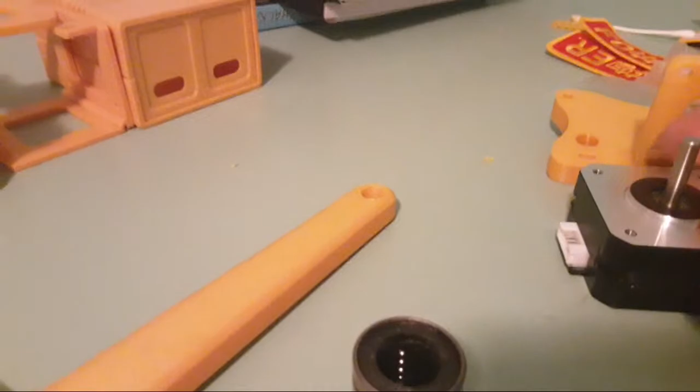Little bit of progress on this plotter. Got some steppers and bearings. Some more bearings, I think. I think this trip I've got some electronics. I went to get electronics and screws the night before, and yesterday, and ended up with the wrong size screws and the wrong electronics. So hopefully tonight I've hit a jackpot. Otherwise, I'll just keep going. They're in the storage unit somewhere.

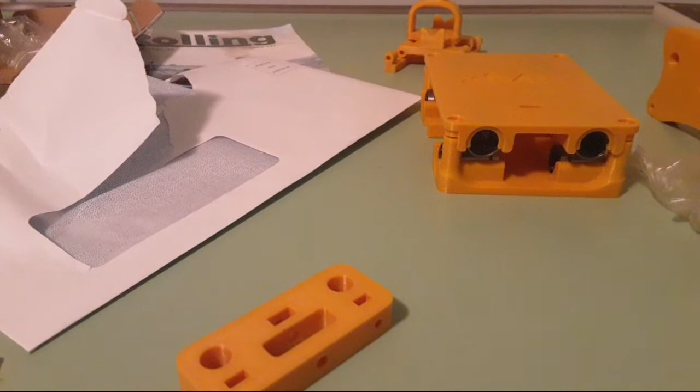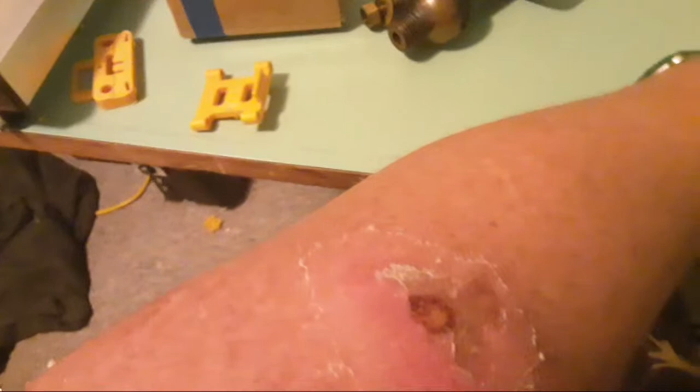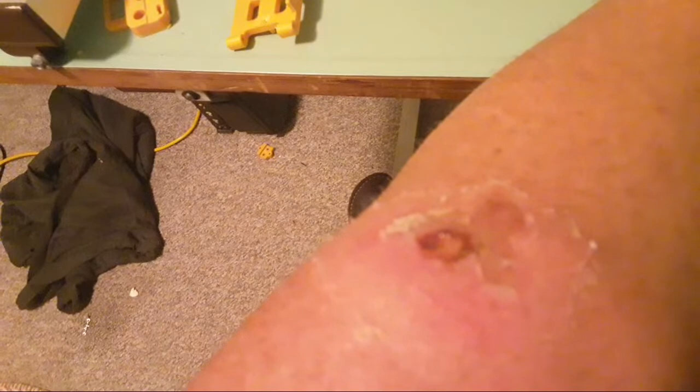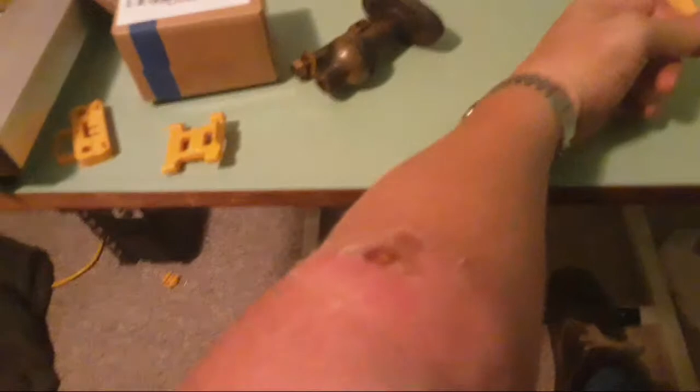What's happening? Look, I wasn't feeling real good last week at all. Bit ordinary actually. So, upshot and outcome of that is that I got bitten by a spider, which isn't fun. And that's probably where the issue was anyway. It's gone down a bit. It's not as crazy. Let's have a look here. But it's not as crazy as it was. The skin's all peeling. Try and get some focus happening here. Sorry. I'm not doing real well with that. Really?

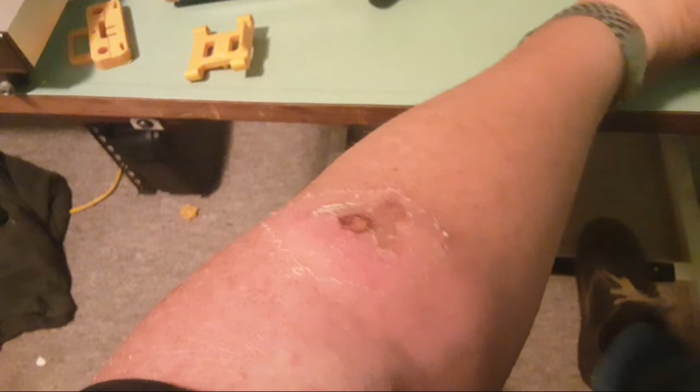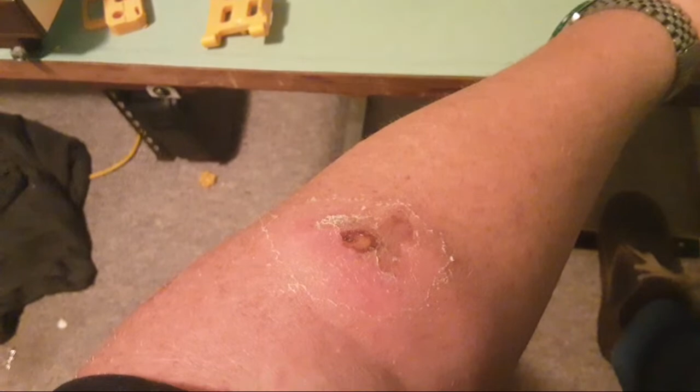Anyway, had a big hole in it on Sunday night. Saturday, I really had a temperature and I really wasn't feeling particularly good. Sunday, I probably felt a little bit better. Monday wasn't terrible, I guess, at work. Tuesday, I got up and did stuff. Today, I went to work and by about 4 o'clock, I had a temperature, but that's fairly normal with this. Anyway, I think it's coming right.

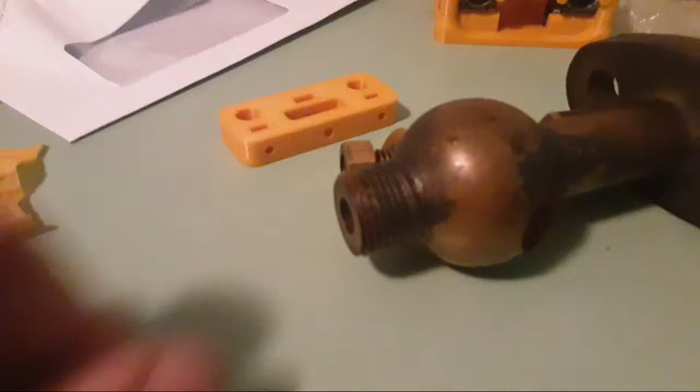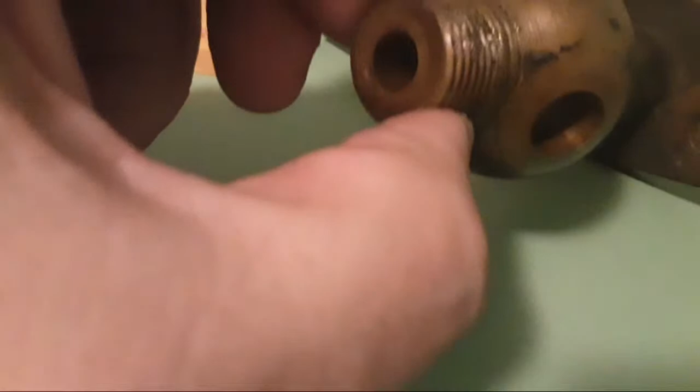We've got this. I guess you all know what this is. Our experts would know exactly what this is. Besides being covered in 600 weight steam oil, this is a drain cock off a Fowler traction engine or a Fowler roller. Cylinder drain cock. Or, well, such as it is. That's sort of the theory behind it, but it's pretty rugged.

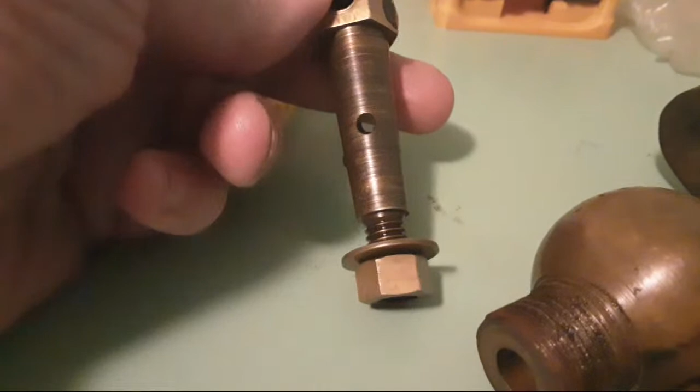This is the plug out of it, which sort of works. It closes one way, which is all it has to do, because the hole's not straight through the plug, because it's just been put in here and drilled. I think we could do better than that. And it's got a hexagon on it, which it shouldn't have. The hexagon's a bit crap. So, handrail knob.

So, going to make 4 of these. There's 4 of these, all up. And these are all sitting in different depths. Some of them are touching right up here. Some of them have got 1/4 inch gap. Some of them have got enough thread to get a nut on, and some of them almost do. Some of them don't do up tight. They're a bit ugly, and they're hexagon. So they need to be square on the end, and they need to be a little bit oversized, just a fraction, like 30 thou oversized, 25 thou oversized, something like that, at the same taper, pretty well.

Gonna make 4 of these, say 25 thou over, with thread on the end, find some washers and nuts, and a square on this end. And then I'm going to make an extra one on the same setting out of silver steel. And we'll cut that in half, that'll split it, and sharpen up the flat side, and we'll have a reamer then to clean these out.

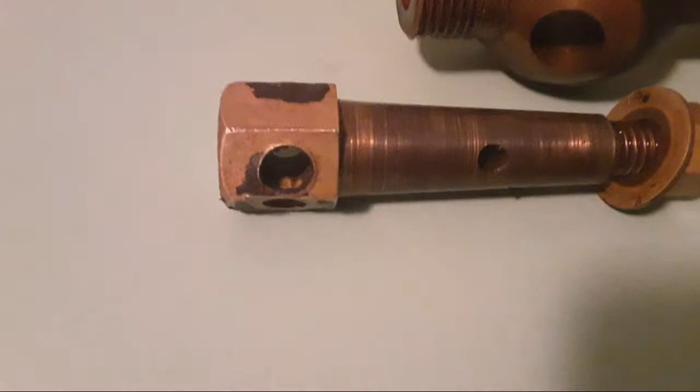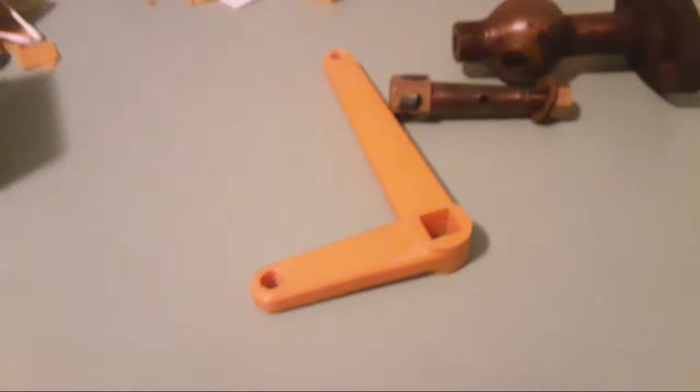That's the theory. We run a reamer through them until they all fit in the same depth and everything else, and the nuts all do up nice. And probably we'll have a nice slotted hole in here all the way through to get plenty of steam through, which will help. So that's the theory with them. They should have, right, this crazy system. This is a little bit better than the crazy system that's got, but it's still not ideal.

Right. What is the angle and is it a standard? Really good question, Stuart. I'm just going to set it up between centres and get the cross slide right and read it off, and I'd say that'll do. That's where we're going to go with that. And while the machine's set up, I'm going to do all 4, and I'm going to do the spare for the reamer.

This lever needs to be steel or brass or something. I think they'll be cast iron, to be honest, but probably going to be cast brass or just out of steel or something. Joe's offered to CNC mill them, whether that's going to happen or whether I actually just go and get 4 of them cast. File them out to match, but they go on there. Like, they're supposed to go on the square that's actually a hexagon with 4 holes in it, because this had bits of flat screwed through here.

Look at this. Had a piece of flat screwed out here, another piece of flat screwed out this way like this, and that's what was used, was the lever. I think we're going to improve that, Dan. Sorry about your automatic shut off, but I think we're going to fix this properly. There's no point doing it half-assed if we're going to do it.

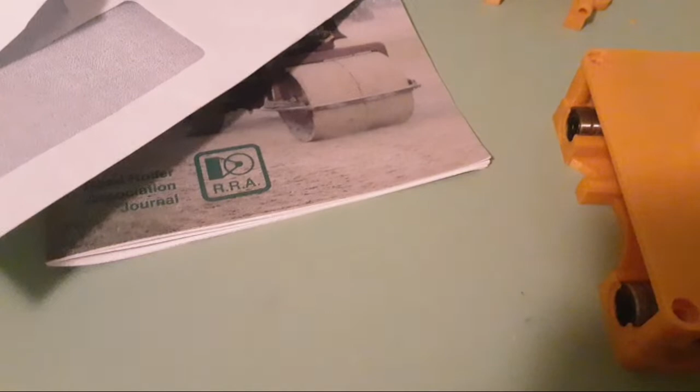In and out of consciousness was probably not my doing, or something. That was probably something that Dan had control over. So that's kind of where we're at. Excuse me.

So the sooner I can get the lathe back here to do some of these little jobs, the better. Nigel's just bought a laser engraver cutter. That's awesome. It's probably much nicer than mine.

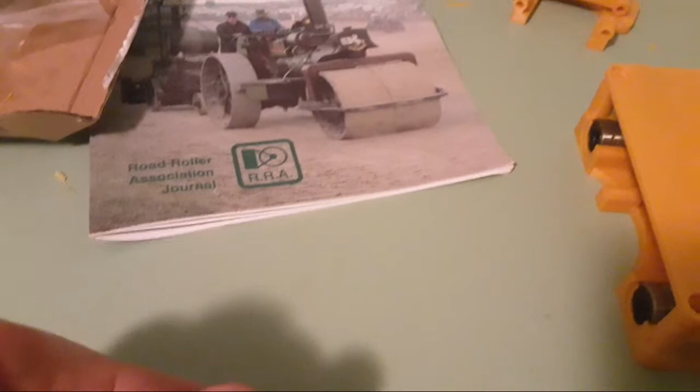Anyway, went to work today, and that's kind of a bit soul destroying, to be honest. Really wasn't feeling it by about 4 o'clock, but I've got a Bowman Mercia watch on the bench that's not keeping time. Basically, I think it's just filthy dirty. It's probably worn out.

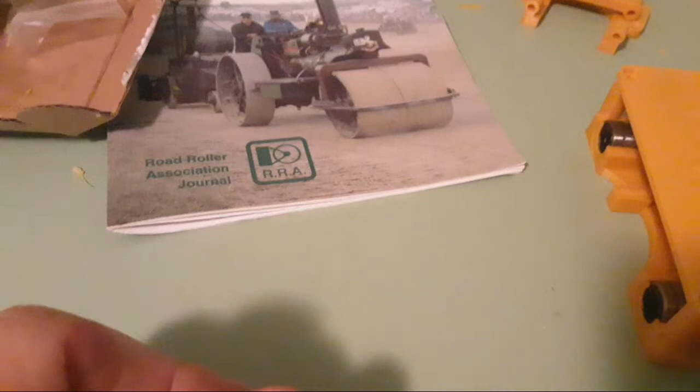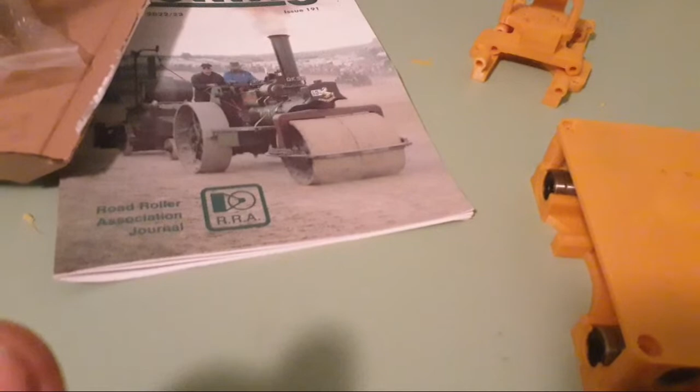Anyway, need to bring an ultrasonic up and some ammonia and stuff and give these a good scrub. Get all these bits bright and shiny again before we put them back on. And hopefully probably Easter time I might go down and spend a day putting some of these bits back together, seeing what we need to do.

Whether we put the mains just back together and say the 15 thou gap in them's all right, or whether we actually buy a bit of bronze off someone and make a couple.

Must have found it then, Dan. That's awesome.

So this place is a bit of a shambles because I've just been unpacking stuff and it's full of boxes and paper and stuff. And I haven't really put anything away properly. I have got my drawing cabinet, which is awesome. I've got a few little tools. I've got a few projects.

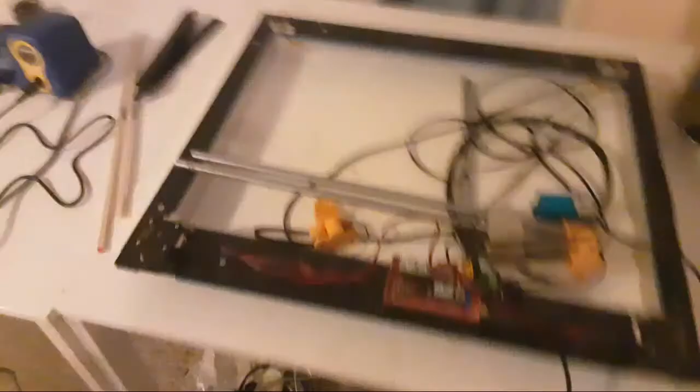Yeah, this come back in bits, so we're going to have to sort this out and get it going again. Not the end of the world, but these were all ABS. I don't think that was the right thing to print these out of. We need some of these. We've broken this piece, I think, and broken the end pieces. So I just got to find the files. Anyway, we'll do that and get him all sorted and get that going again.

Anyway, it's very important to have a kitchen welder. Poor Joe. Gonna put up with a lot by the time we're finished. So, this place is pretty lived in actually this week. Or today anyway. It might be better by the time I go to bed, I hope. Anyway. The TIG will go outside. It's just we haven't got there. It only turned up last night. Anyway. So, that's what we've done.

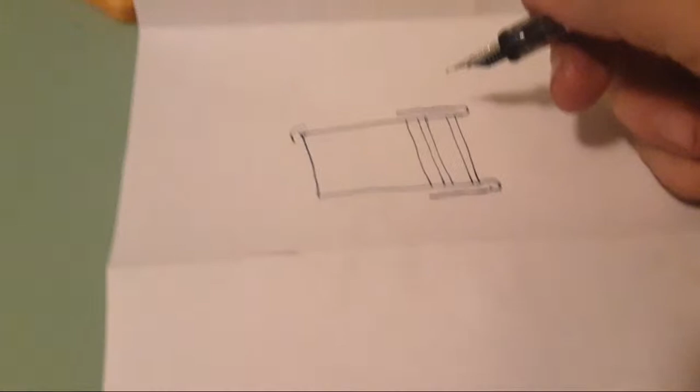In this end, with a bolt through here and a bolt through here, this bolt's just an ordinary bolt with 2 lock nuts on it, neither of which are the same size. And this one here is sort of similar. It's got 2 lock nuts on the bottom too. This bolt goes through, and then it's got a thread on this end up here. And that holds the big end basically, or the conrod. Sorry, the conrod in the brass, which is this part here. See.

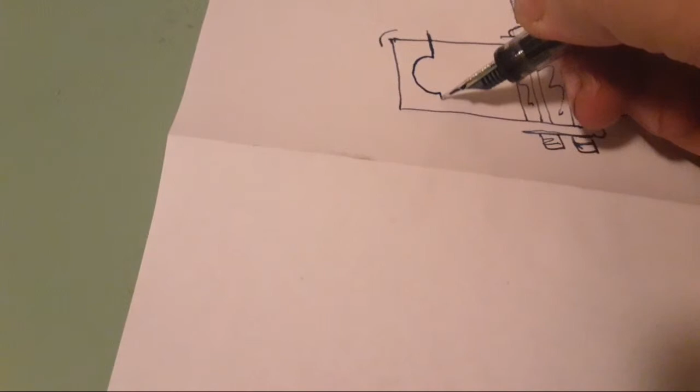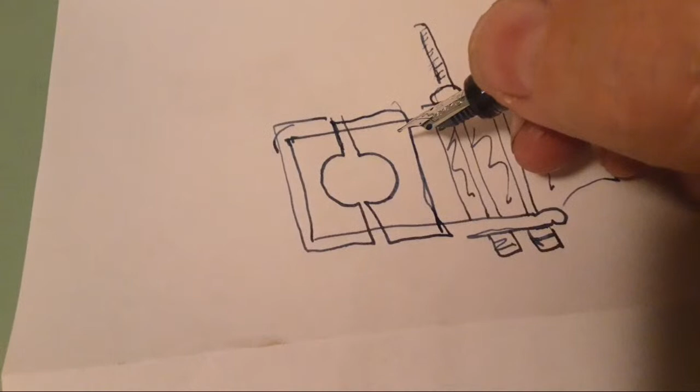Now, the brass is in 2 bits, and it fits around the edge here, so it's got a lip around the outside. One goes in there, and the other one's supposed to go in here like this. Right, something like that. Right. Now, there's a slotted wedge goes in here, and inside here there's a plate with a tapered slot in the middle, and then there's a slotted wedge comes down here, and that goes basically across here, and it's got a nut on the bottom here and a nut on the top.

So what happens is that when you tighten this down, it pushes them together on the shaft. That's the theory. But this here, behind this plate, is about 1/4 inch of wedges, and this is screwed right down as far as it'll go. So basically these two faces are up tight, here and here,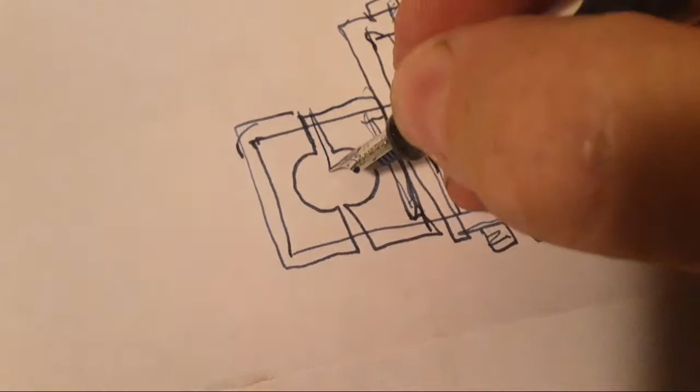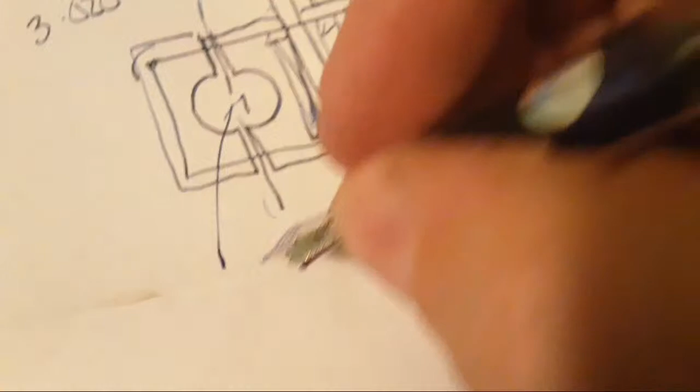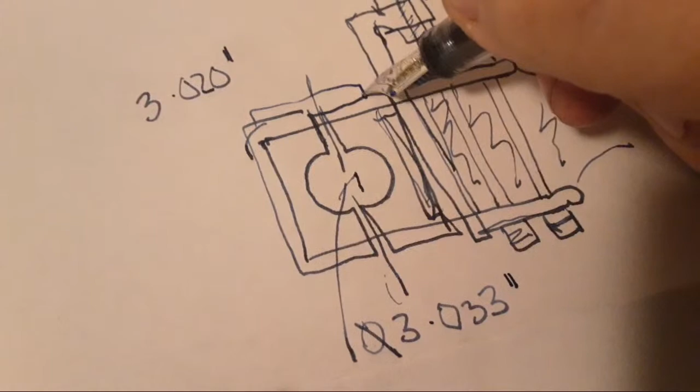and the crankshaft is 3.020 inches, which is 20 thou over 3 inches. This hole here is 3.033 inches, which is 13 thou bigger with these up tight than the crankshaft. So basically the oiler sits on top here too, but we'll get to that in a minute. So what's happening is oil's running through the hole, and it's just running out, and it's just flicking out everywhere because there's nothing holding it in.

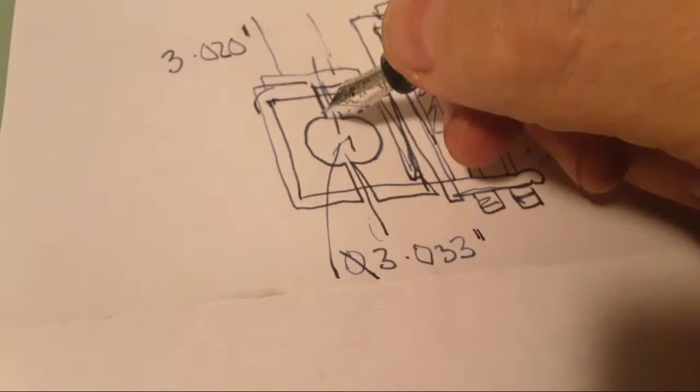So when you look at this brass here, which they should be pretty much identical, but this one here is about 8mm, well 5/16 if you want to work in black and white, shorter than this one, right? So that's how much has actually been filed or ground or milled off this end to keep this side and this side in contact with the shaft.

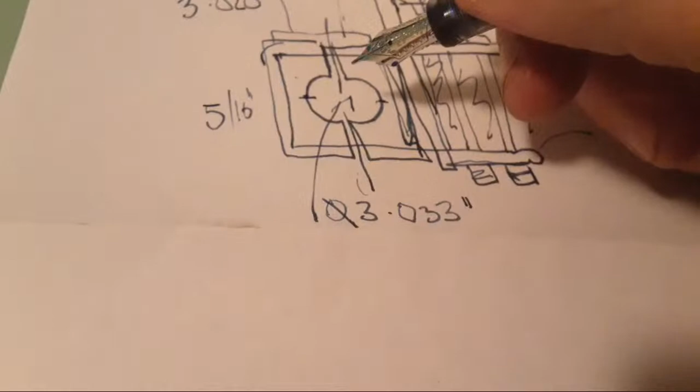So basically, probably you can fix it by taking a little bit more off the front brass, another 10 thou, whatever, closing it up and running a hone through it and putting it back together with another shim. That's probably the correct way of doing it. If you put another 1/8 of an inch shim in here, then this taper would lift out far enough so that there's some adjustment on it and everything would work. And that might be a half reasonable sort of temporary fix, but it's not really a good fix, to be honest. What it needs is new brasses.

This oiler here has a tube up the middle, about that high. Then it's got a lid that screws on, and another little lid in the top with a hexagon for filling it, apparently.

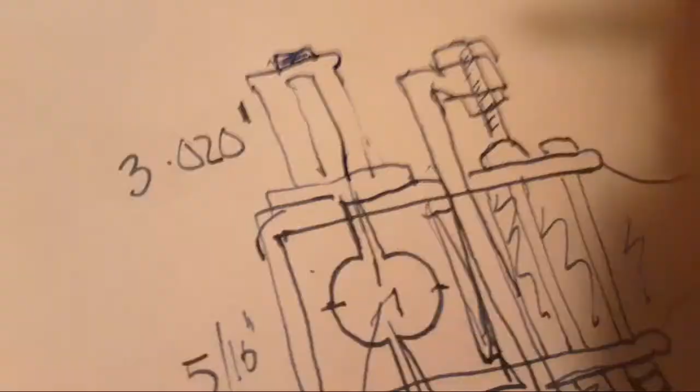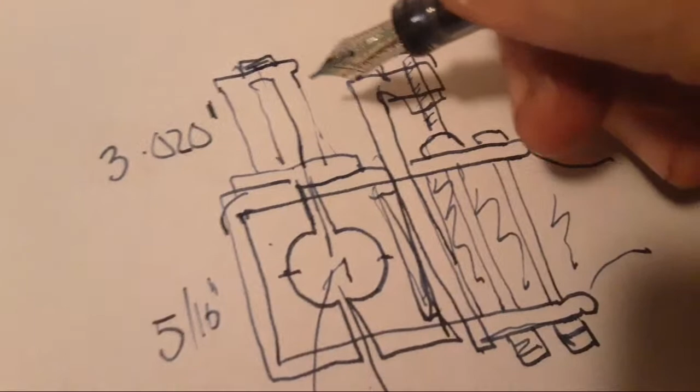So what happens is that when you take that little lid out, there's nothing stopping that. There's no way you can get oil down inside the reservoir, and there's no point if you do, because there's no wick in it. So basically you fill this little tube up and it runs out the bearing, and that's why it's getting hot.

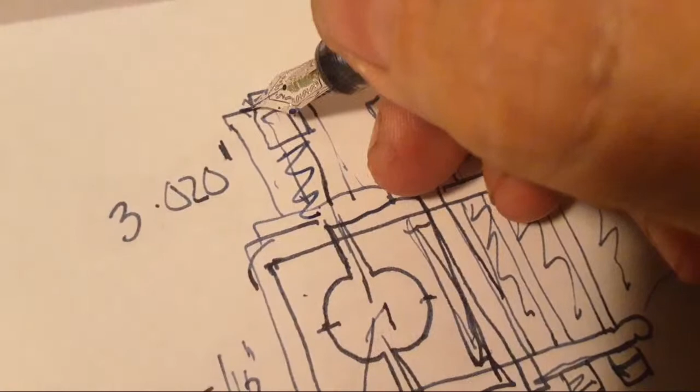So this oiler should have a little dome piece on it that slides on over the top somehow, and a spring on it, and that should work inside a hole there. So when you put the oil can in, push that down, and then oil just comes out here, and then it's got a wick up through the middle. So that needs fixing, and both sides need fixing.

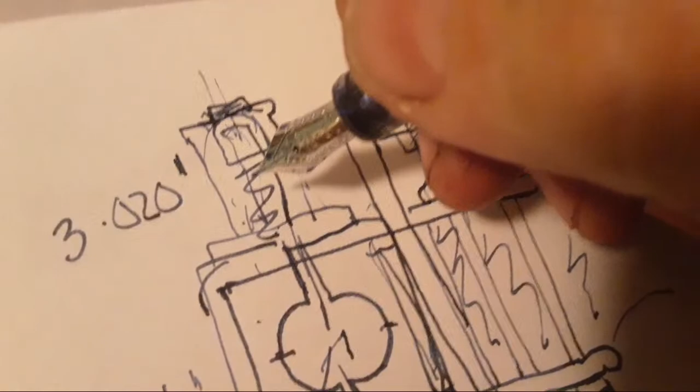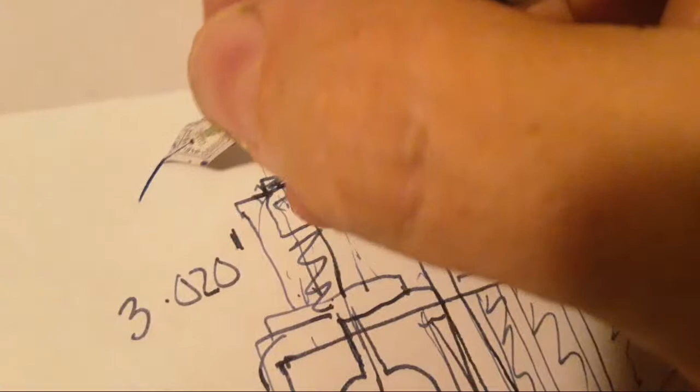It would have a wire on it with some worsted wool. That's what it had. So basically there's a wire to hold it in place, and it's a loop of wire like this, twisted up on the end, with a bit of natural wool hanging on it, right?

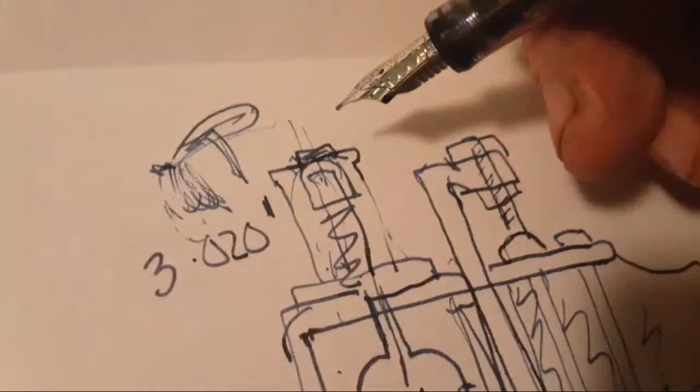And this is pushed basically down the tube. This end is sort of bent up like this. And then this end here is pushed down the tube so that some of this wool's hanging out. And that's what holds it in place. That's the way they're done. I've done several of the oilers already with wool, and it's not going to be terrible. But this oiler is substandard, so you can't fill it up anyway, even if it does work.

Anyway, we're going to have to work on that. But it's not the only thing that's going to need some work. These really need new brasses. And I guess you could probably build these up with a bit of brass, and that's probably the way they would have done it in the olden days. Build them up and remachine them.

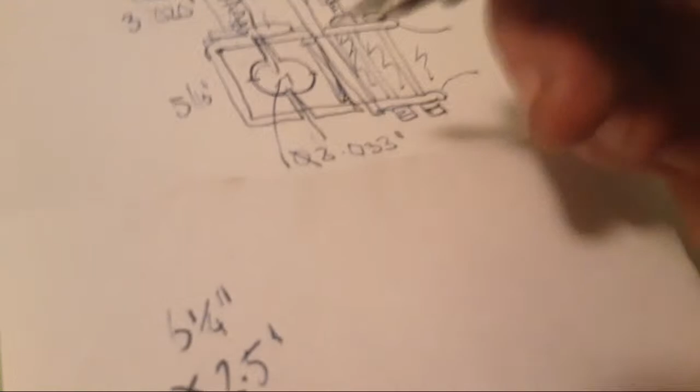But I think you get both these bits of bronze, these two brasses, out of a bit of stuff that's about 5 1/4 by, I think it's about 2 1/2. So if we got a bit of bronze that big, we'd make one side. And I believe I may know where there actually is a piece. So that's where we're working with that.

But sorry about the mud map. There will be a video coming if I can actually get it uploaded so anyone can see it. But that's how they work.

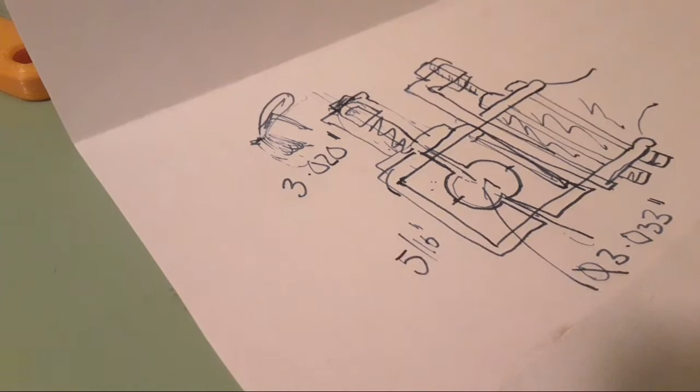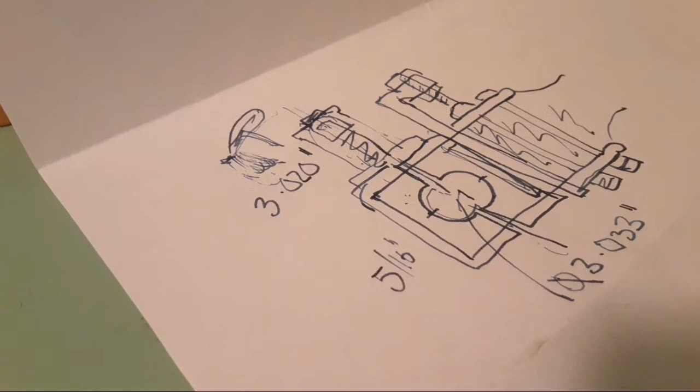And it's a bit substandard, to be honest. There's a lot of things on this roller that are a bit like that. Anyone who had a hand in the restoration will tell you that it was done as a working engine, which is code for we took shortcuts, and everything was a shortcut, I think. But the boiler's good, but the paint job's terrible. Some of the mechanics aren't as good as they could be. Anyway.

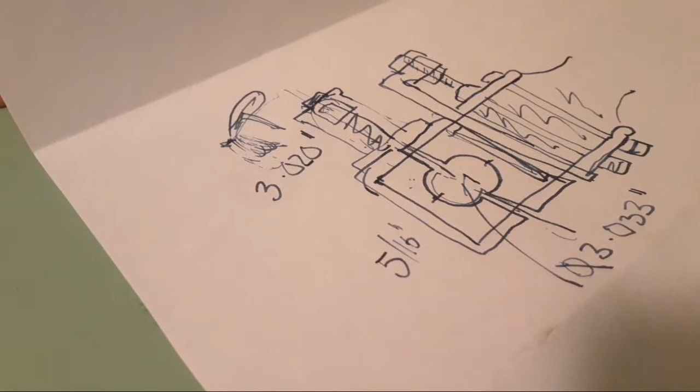All you old people getting your knees replaced and stuff, that's awesome. I'm glad you're all going well.

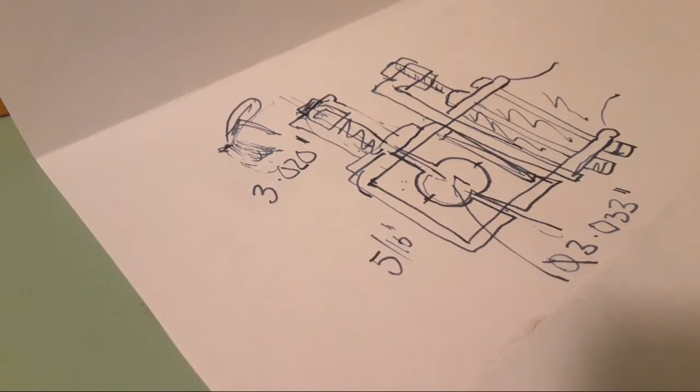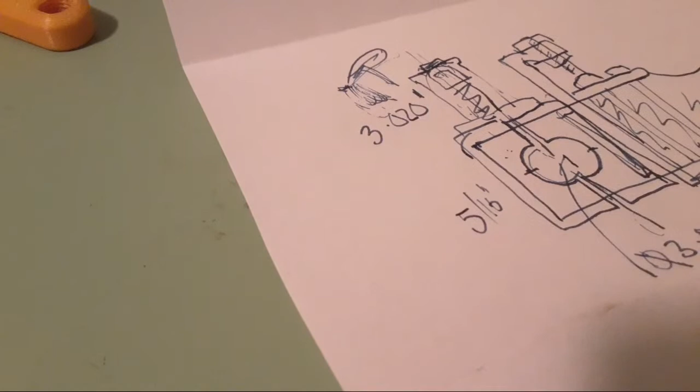So depending on time restraints, probably what I'm going to do is take a bit off here, right, put it back together so that it's got a little bit less rattle in it, and give it a bit of a sand, like a bit of a hone, put it back together and see what we end up with. Probably put another shim in it so there's some adjustment, because there isn't any left.

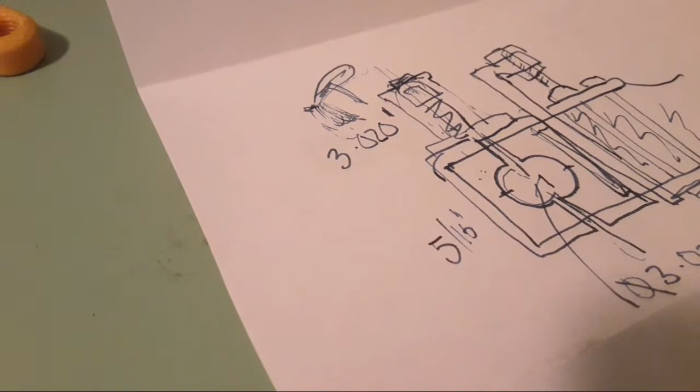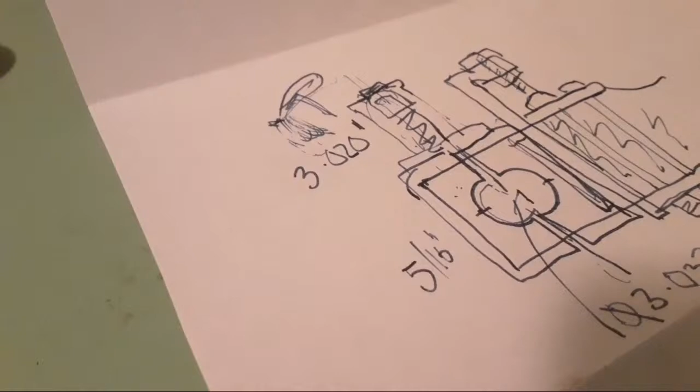Anyway, they're the things that I'm thinking about in my life. That's what's going down and up and down and up and down. Not sure that there's any resolution on any of it, but there you go.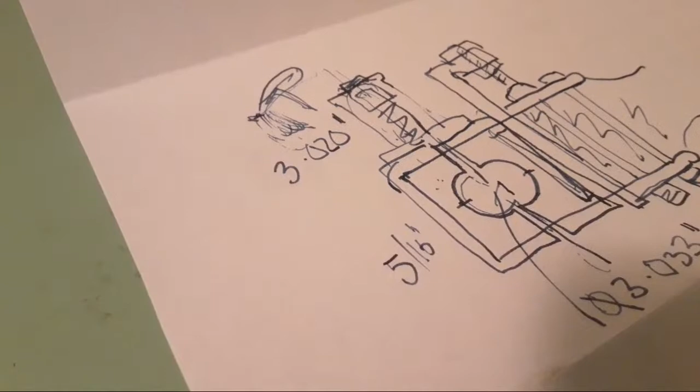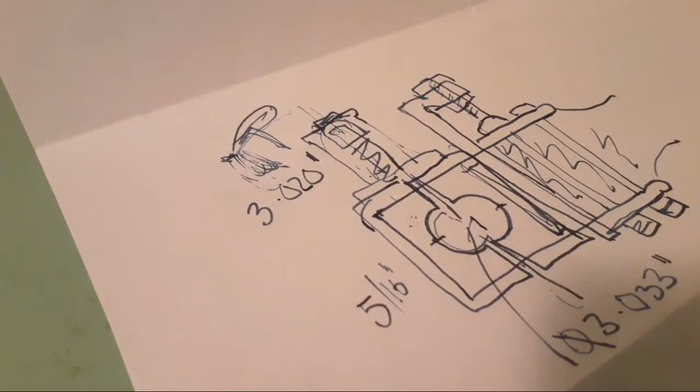Anyway, there's a bit of work involved in all this, and it all needs a good clean up and a draw file and tidy up anyway, so that it looks like it's meant to be, rather than some rotten old job that someone's put together with a ball peen hammer. And if we were going to do them properly, I guess some of these nuts and things all need replacing, because they're all a bit all over the show, to be honest. There's no two sized nuts on it the same, in the way of all pre-Second World War English crap.

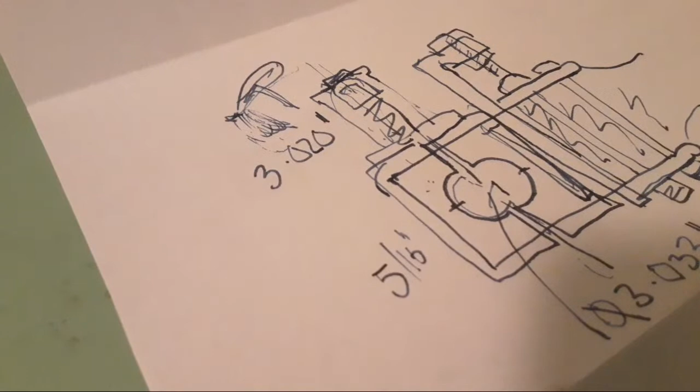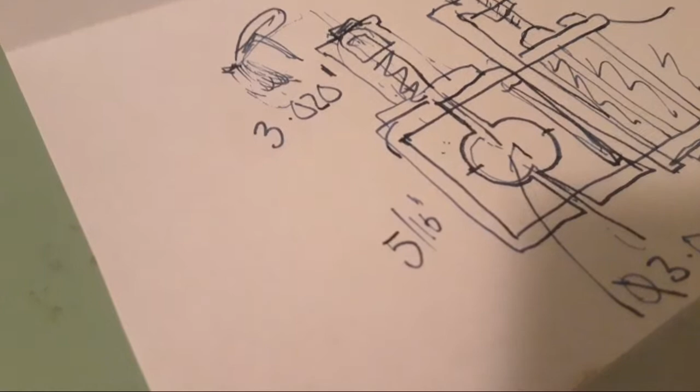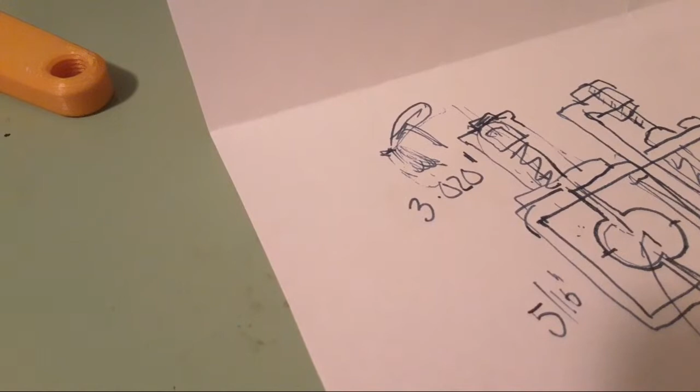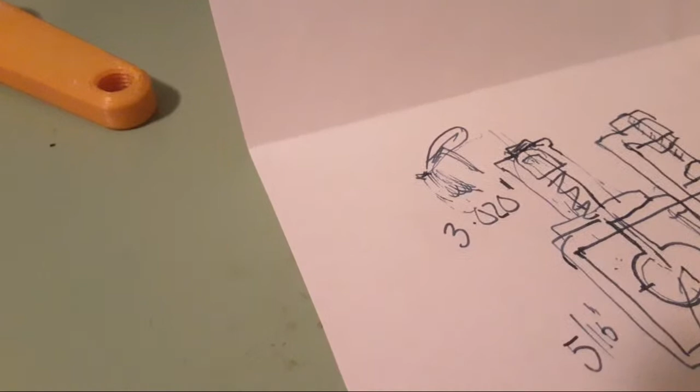So, see you, Darren. Sorry, Stuart. That's probably better.

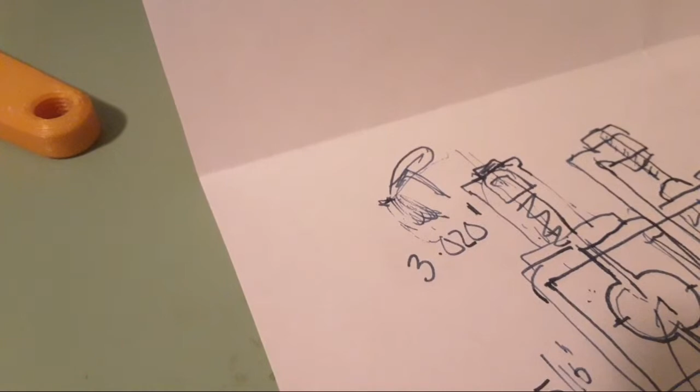At the moment, I'm just preoccupied with steam engine bits and with moving and getting as long as I possibly can out of my van before I've got to go and service it, because it's going to cost money.